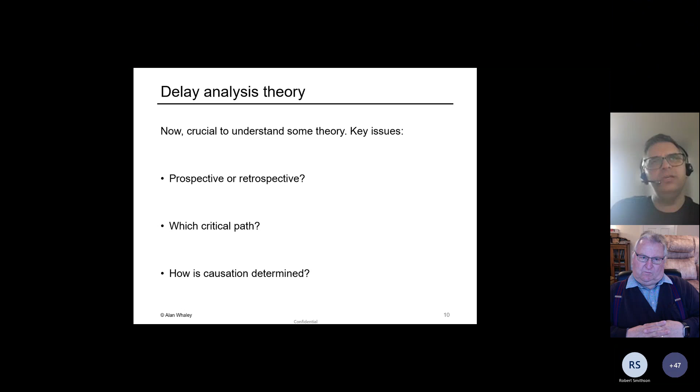So when we talk about delay analysis theory, we can break it down very broadly into three key issues or questions. And I just want to go through these key issues and questions one by one, and reflect on them, just to understand what their implications are and how they can be used to analyze a methodology or a claim that you receive or are preparing.

So the first question is, prospective or retrospective? This is something you can probably all relate to. We have two possible approaches when we undertake a delay analysis.

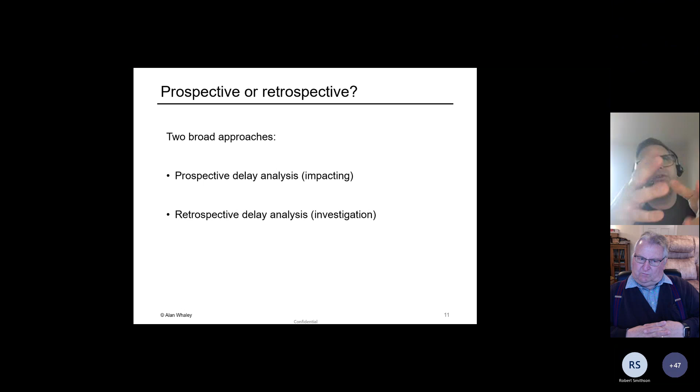We can either take some kind of electronic program and make a change to it. We call that impacting. So we've all heard of an impacted program or a cause-effect program, this sort of thing. All of that stuff, which is driven by software and modeling and changing logic links, the kind of things planners do, really falls into the category of prospective delay analysis. It's creating a hypothetical model of what could have happened somewhere far away in a parallel universe,

but it doesn't actually show what happened. By contrast, of course, we can do a retrospective delay analysis. We don't have to impact any program when we do that. That's a waste of time because we should already know what happened, because it has actually happened. So what we tend to have to do in this sort of analysis is investigate information.

So we're going to be creating things like as-built programs, investigating when things happened or didn't happen on the project. We're going to be investigating chronologies that relate to our as-built program. We're going to be looking at the construction methodology very closely as well. So basically, retrospective delay analysis in principle shouldn't involve any sort of program manipulation or impacted programs, because by definition you should actually know what happened, so all of that's unnecessary.

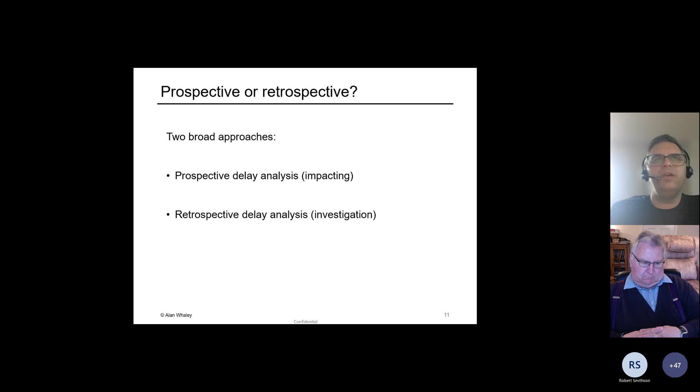So they're the two sort of philosophies, I suppose, and this is really overarching all of the theories that we're discussing today. So I'm going to quote a little bit from the Society of Construction Law Delay and Disruption Protocol. If you don't know what that is, just stick it into Google and you'll find out. But it's basically a very, very good protocol of principles that relate to good claims and project management, program management. But it also, I would say, is probably the leading authority on different types of delay analysis and how they work in a very broad sense.

So if you haven't seen the Society of Construction Law Delay and Disruption Protocol, my recommendation is download it after the call. If you have, you'll know that there's a second edition out now. It's been out for a few years, but the 2017 edition is the one that's up to date. So the Society of Construction Law says this: a prospective delay analysis identifies the likely impact of historical progress or delay events on a future completion date.

But the issue to note is that the conclusions of a prospective delay analysis may not match the as-built program because the contractor's actual performance will differ. And the reason that it differs is because of things like resequencing or redeployment of resources, and the contractor might do that, for example, to avoid liability for liquidated damages. It might wish to mitigate the delay, or indeed there might be other events which are the employer's risk or the contractor's risk, which change how the project's constructed again.

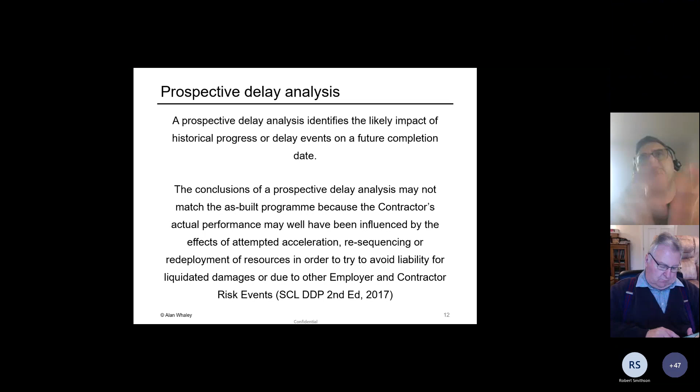So in a prospective delay analysis, we don't care about all of that stuff at the bottom of that slide there. We don't really care if the contractor resequenced the work or didn't, because what we're producing is something that forecasts a possible situation that might happen in the future. So we have to be really careful with prospective delay analyses if we're looking in the forensic delay analysis context, because prospective delay analyses are a tool for a job.

We are going to use prospective delay analyses if we need to, and the situations where we might need to are for things like quotations. If we're asked to give a quotation for a variation, then clearly the variation probably hasn't yet been carried out. So it's useful then to produce a prospective delay analysis to show the impact of, say, changing the floor from timber to precast or something like that.

We might wish to give an indication of the likely effects of a delay. We see this in, say, the JCT contracts, where we have to give a notice as soon as we can, giving an estimate of the likely effects. So to do that, if the event's one that's ongoing or that's going to occur in the future, we might want to do a prospective delay analysis for that sort of thing.

And if you're on the project, and you're doing a bunch of EOT claims and you're working with another planner or project controls manager, no problem, do a prospective delay analysis as long as you're doing it near the event. The challenge here, though, is that these prospective delay analyses are, as it says on the tin, theoretical. They're inherently theoretical forms of analysis. What tends to happen is that contractors tend to like prospective delay analyses because they tend to show more delay, let's say, than was actually incurred if we look back.

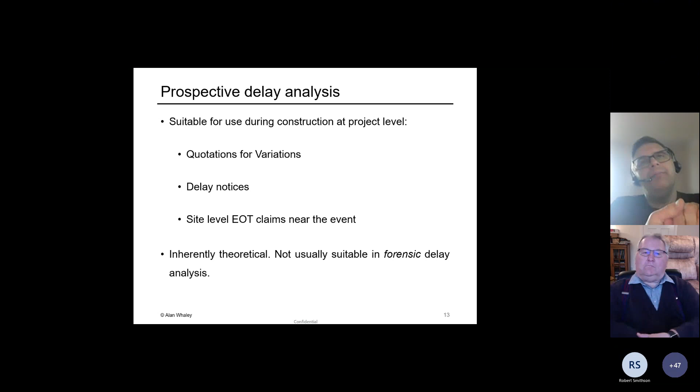prospective delay analysis is great as long as you're using it for what it's meant to be used for, which is prospective delay analysis, but not really suitable in forensic delay analysis because it's just theoretical. It doesn't show what actually happened.

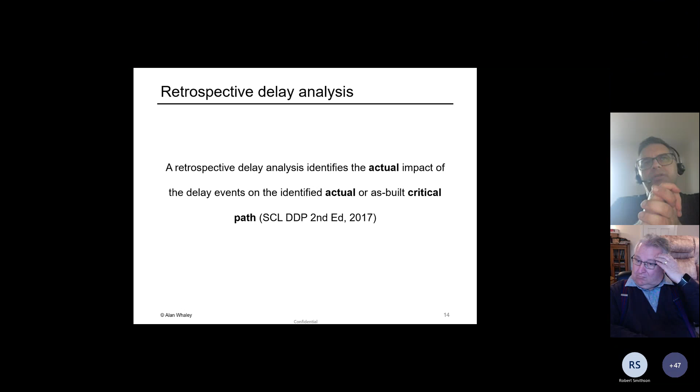The opposite philosophy then is retrospective delay analysis, and this is really simple. We're trying to identify the actual impact of a delay event on the actual as-built critical path of the project. Actual or as-built critical path of the project. So much simpler here. We shouldn't, as I said, have to worry too much about modeling anything, because we should now be able to refer back to site photos and other as-built records to determine exactly what happened.

So we're not going to do a retrospective delay analysis for a variation proposal, plainly, because the variation hasn't yet been carried out. But what we tend to use retrospective delay analyses for is finding out what actually caused delay. So you might have to do a determination if you're a contracts administrator, and very often by the time you do that, the events have passed. By the time you receive the contractor's claim, the events are many months before, so it makes no sense then to try and do a prospective delay analysis.

If you're a contractor, you might have issued a series of prospective delay analysis notices along a project, but at some point you want to look back and just make sure that you've properly accounted for all the delays, because you may not have actually identified all of the relevant events if you've just been doing prospective delay analysis. You haven't actually investigated what did really cause the delay. So sometimes as a contractor, you want to look back and perhaps just make sure you've found out all of the real causes of delay, so you can make sure that they're claimed, say, in a consolidated EOT submission. So typically we would do that under, say, a JCT contract at a final account stage.

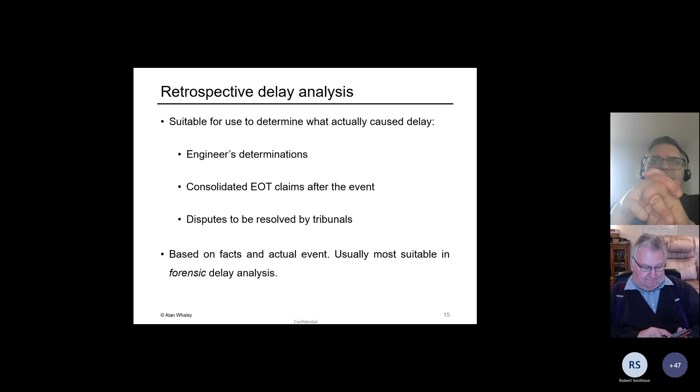And obviously, if you're in court or if you're in adjudication, we wouldn't normally want to do a prospective delay analysis, save in limited circumstances. Perhaps we're under an NEC contract and there's a CE that's disputed or something like that, a compensation event. But generally speaking, tribunals, as we'll see a bit later, tend to prefer retrospective delay analyses. So because retrospective delay analysis is based on facts and actual events, this is usually much more suitable to forensic delay analysis, the sort of delay analysis we use in legal disputes.

The key question overarching all of this is where does the critical path run to a milestone or a section of work? And one of the theoretical issues that we have to understand is that there are different critical paths. So this is a quote from a case called Motherwell v. Micafil. The question, the court said, was: is the delay on the critical path? And once we have a delay analysis, the results must be tested to accord with common sense and fairness. So does this delay analysis make sense?

So what we see again and again is the courts recognizing that the critical path is important. And the reason it's important is because the critical path is the link between cause and effect. We often hear people saying, well, you have to link cause and effect, without really thinking about what that means. But if you've ever wondered what the link between cause and effect is in a delay claim, then just refer to the critical path, because it's that path that links the cause to the effect.

So it's crucially important as a matter of causation that we do a critical path analysis, that we don't just merely look at individual events in isolation of other events, that we actually look at the entire project and the progress of the work and place the events in the context of that, so we can form a judgment about whether in fact something was on the critical path.

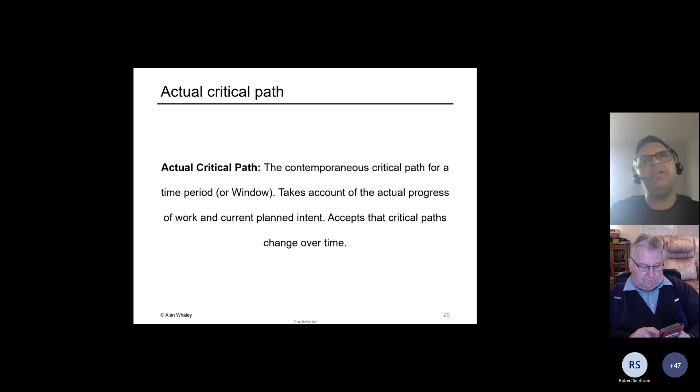We don't just do this to make the report very long. We do this because we accept that critical paths change over time. So if you're building a house, your critical path might be running through the roof. But if the house falls down, then the critical path changes. It runs through the demolition and the rebuilding of the house. So it's pretty obvious that critical paths can change, and this approach takes into consideration that critical paths change over time.

So going back to our project then, we can have a look at the program in week 5, and we can see that at this point in time, we have a change in our critical path. So from weeks 1 to 5, our structure has been going somewhat as planned. The critical path ran through the substructure and then the steel frame. But sometime between week 1 and 5, that 2 weeks of float that we had on our pipeline has been eroded. So something happened before week 5 to cause at least 2 weeks of delay to the pipeline. And as a result of that, the pipeline is now the critical path. It's the longest path to completion. It's driving handover.

So at this very moment in time in week 5, this is the date the critical path changed. So if our analysis looks like this, it means that we're identifying the actual critical path, because in window 1, in weeks 1 to 5, we say the substructure was critical. So we might be interested in substructure variations or disruption to the steel frame. And then after week 5, we say that the pipeline was critical. So we might be interested in variations to the pipeline or other things that affected the pipeline and thus caused critical delay.

We then have a third type of critical path, just to add to the confusion here, and this is called the as-built critical path. And the idea here is that we take our program and we draw a line through the as-built program. And what we're trying to do here is find out the retrospective longest path in the as-built program. But crucially, in the as-built critical path approach, we don't really identify critical path changes, because we're taking the final program. We're not actually tracking the project as it was built, but instead we're just taking the final program and drawing a line backwards through it that represents the longest path.

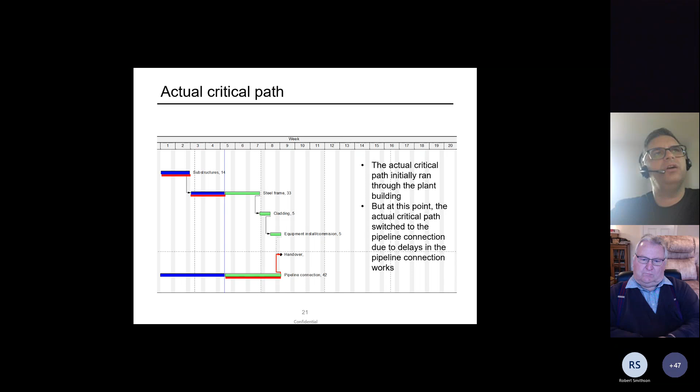And parties, both contractors and clients, use this opportunistically because they want to select a critical path that most suits their version of reality. Because if all this contractor delay was in the pipeline, then the client might say, well, there's no EOTs on this job because you were delayed in the pipeline, weren't you? But equally, if we go to the actual critical path, the contractor might have been genuinely delayed for 2 or 3 weeks in the substructure, and would legitimately be able to argue that the substructure was a cause of delay.

So one of the questions to ask yourself is, what exactly is this critical path? Is it an actual critical path? Is it a prospective planned critical path? Or is it an as-built critical path? Because you really need to understand that. But crucially, both the planned critical path and the as-built critical path may not correspond with the project records, because the project records are produced during the project and describe how the project was actually built. And neither the planned nor the as-built critical path really properly reflects the sequences of work and the mitigations and the resequencing that happen progressively.

The final issue in theory is how we determine causation. What I mean by causation is linking a cause to an effect. So what's a cause? Well, it's very simple. It's the reason why something happened. What's an effect? Well, very simply, it's what happened. And we can then join those things together. A cause and effect analysis is just simply explaining why something happened. There's nothing really complicated about this at all. We often hear people talk about cause and effect analyses, but there isn't any sort of discrete thing that you're doing there. You're just explaining why something happened. That's what a cause and effect analysis is.

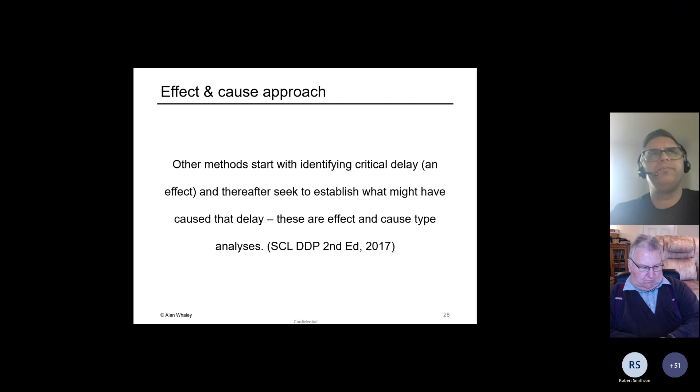And once we find out where the critical path ran, we can locate the events that actually fell on that critical path. And as such, we can determine what really did cause the delay. We don't have to do any modeling or anything like that. So what we do in the effect and cause approach, we flip it round. We find the cause after we found the effect.

So we ask ourselves factual questions like, why did the substructure incur 2 weeks of delay in June? Or why was Zone A completed 4 weeks more quickly than planned? If we're asking ourselves factual questions like that, it means we're doing an effect cause analysis. We're not saying how much delay did delay event one cause, because that's a cause and effect question. We're trying to find out why actually something did happen, and if that's delay event one, or if it isn't, it doesn't matter. We've found out what actually did cause delay.

So what the SCL protocol says on this is that effect and cause approaches are generally more forensically reliable. That is, they're more reliable for dispute resolution because they consider any and all potential causes of delay. You're not introducing a bias by just picking out one cause of delay and then trying to find a delay that might not have really happened, but you can create an impression that it happened just by isolating one delay and ignoring all the others.

So hopefully you can see now how the theory works. What I want to do now is just turn on to how that theory translates into different delay analysis methodologies. Methodology is really important because an expert in delay analysis has to state the methodology that they've used in order that a court can test the conclusions reached by the delay expert. It's really, really important. So a methodology is just a combination of the theories that we've just discussed translated into a series of steps. So if you understand the theories that we've just discussed, you can pretty much understand all the methodologies.

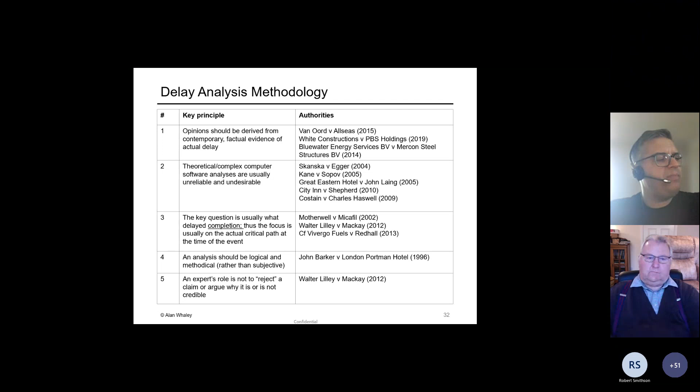There's a few key principles that also practically speaking underpin methodologies, and I've listed 5 of them there. I think the main one really is that, at least in forensic delay analysis, what we're trying to do is derive our findings from factual evidence of actual delay. There's lots and lots of case law that supports factual methodologies over theoretical ones. You can see in that second key principle there that theoretical or complex computer software analyses are usually undesirable. And there's a whole stream of case law that confirms this.

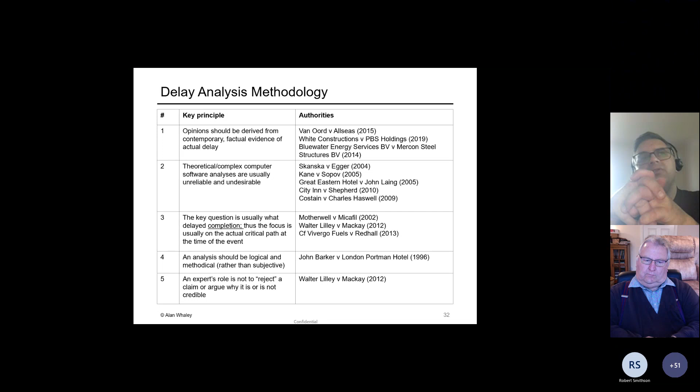We also know from the courts that a methodology should usually be focused on the critical path. So a methodology that doesn't do that is unlikely to be persuasive to a court. And the other two key principles are that an analysis shouldn't be subjective, and also what you shouldn't be doing in a delay analysis is trying to reject or inflate a claim. You're not doing forensic delay analysis. If you are doing that, you're doing advocacy. So you're missing the point a bit.

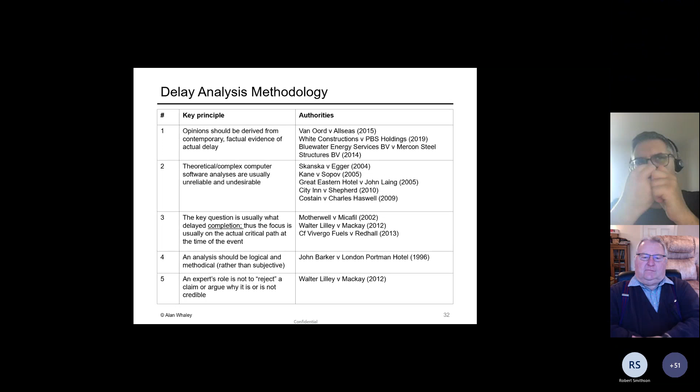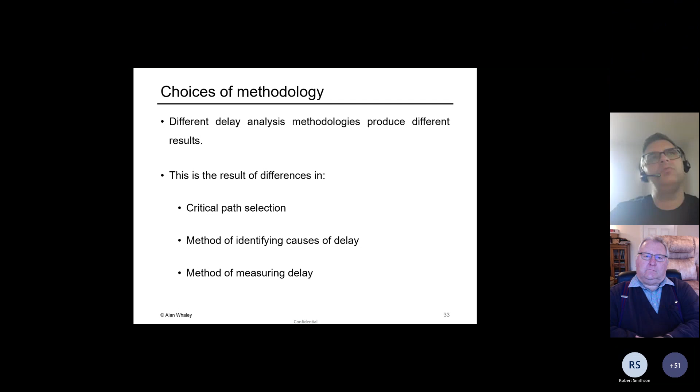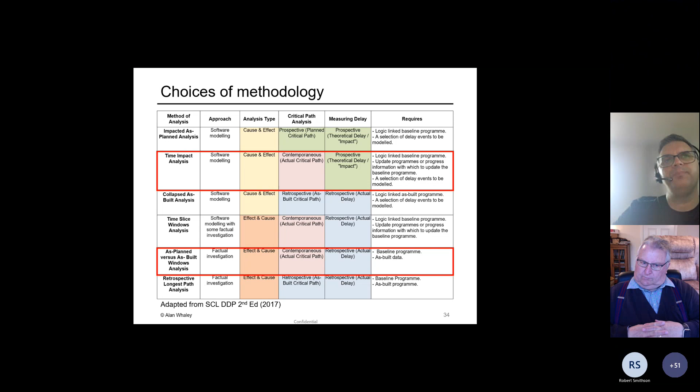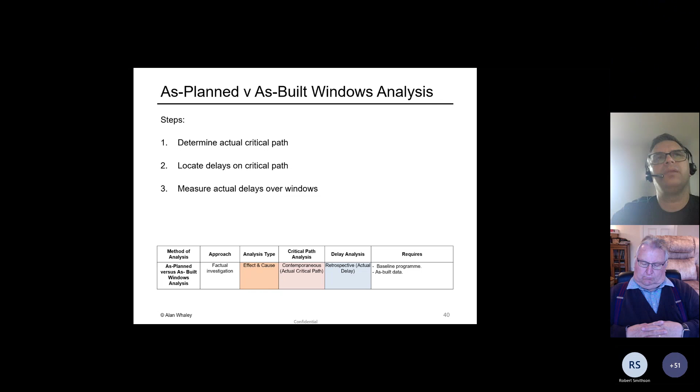So how can we analyze this project without impacting the programs? Well, it's actually quite easy. Once we've got a clear idea where the critical path ran, you have to do that through investigation, looking at the programs that were produced at the time, using construction methodology and some common sense. Once you figure out where the critical path ran, you can then think about where you think a delay event might have occurred, what the important parts of the project are.

And based on this information, you can then start to measure the delays between the planned and the as-built programs over a series of windows which frame important events. So there might have been a major variation, or the critical path might have shifted from the substructures to the superstructures. Whatever it is, you can use windows to measure the delay at key points in time.

So that's what we do. We just compare, this is what it says on the tin. We compare the planned and the as-built programs. But crucially here, we focus on the critical path to make those comparisons. We have to do that.